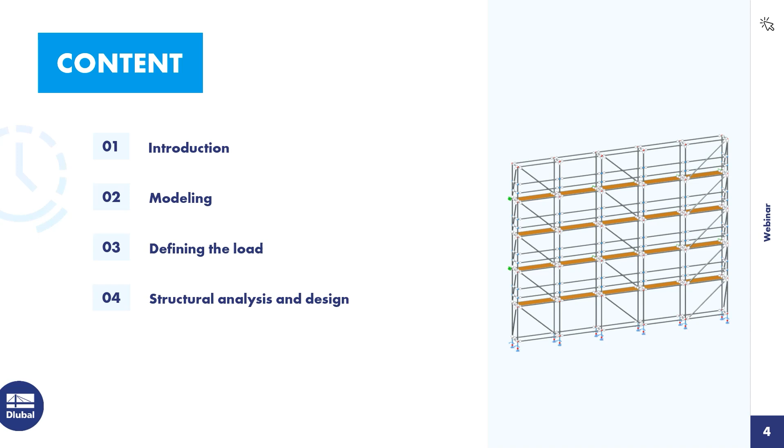To keep the number of combinations as low as possible, I will explain how to define dependencies between load cases so that certain load cases are not considered together. Finally, I will introduce the design using the aluminum design add-on and explain the most important steps in statics. Let's start with the first step, modeling the aluminum scaffolding.

RFEM offers various modeling aids, such as building grids and guidelines that facilitate input, for example, by snapping points at the intersection of these guide objects. Building grids and guidelines can be found in the navigator data under guide objects. Here, for example, you can easily create a new building grid by specifying the grid line coordinates here.

CAD files can also be imported, either for the direct creation of members or as a background layer to support modeling. Import from Excel is also possible. You can find the import functions on the File menu. Numerous import formats are available here.

Recurring components can be saved as blocks and reused as often as required. The geometry and loads of these blocks can be flexibly adjusted using parameters. The blocks are managed in the Block Manager. The Block Manager already contains a variety of blocks that you can use for modeling. Your custom blocks are also managed here.

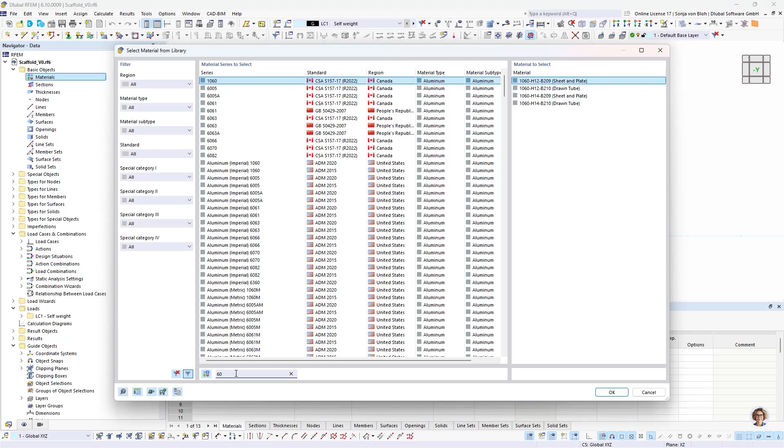Alternatively, it's possible to model the objects individually and combine them into the overall structure using functions such as copying or mirroring. Today, I'll show you the latter approach and start by defining the materials and cross-sections. For the scaffolding, I'm using an aluminum material. I import this material from the material library. Here I search for an EN AW 6082 material and I import this material in my list.

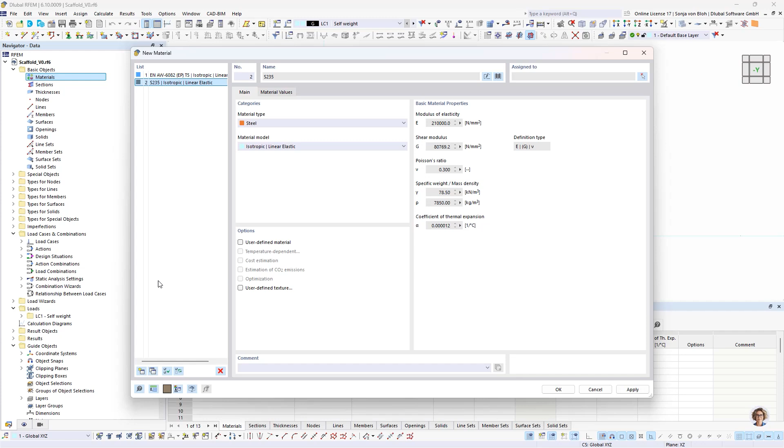The base jacks are made of steel. So for this, I create a new material and I import this also from the material library. It's an S235. Then I create another material for the platform units. These platform units are made of wood, and it's a C24.

Then I can define the cross sections. The standards, ledgers, and guardrails have a tubular cross section. So I create this first. The material aluminum is preset here in this case, so I go directly to the section library, and here I search for 48.3 for the tubular cross section.

The bracing in the vertical plane uses the same material, but with a slightly thinner cross section. So for this bracing, I create a new cross section, and I import this cross section also from the library, 48.3 and 3.2.

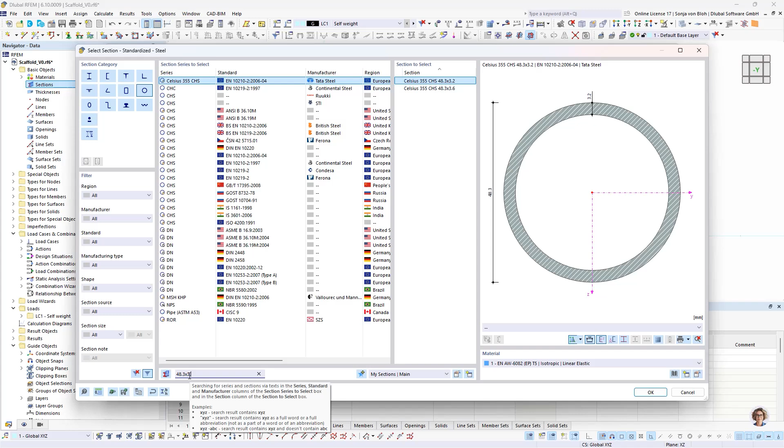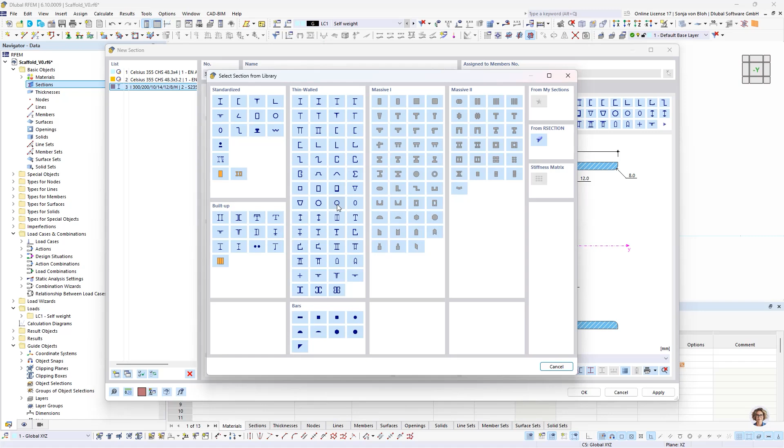The base jack is made of a tubular cross section and made of a steel material. For this, I create a new cross section. I choose here the material S235, and then I define the parameters of this hollow section by defining the geometry. It's a 38 millimeter diameter and a thickness of 4 millimeter, and it's a cold-formed cross section.

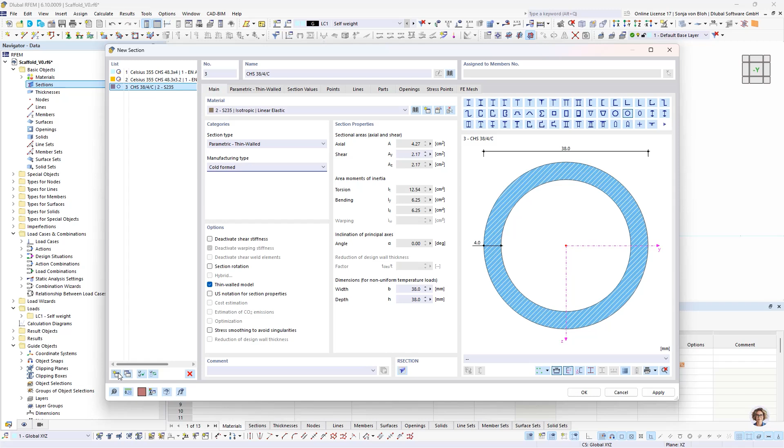The platform units have a rectangular cross section made of wood, so for this I also create a cross section. I choose here the C24, and then I define the parameters of this rectangle, and it's 320 millimeter and 40 millimeter height.

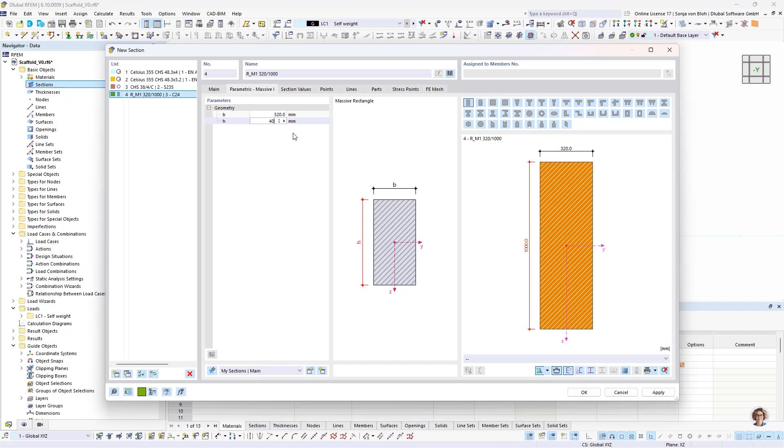Then I can define the structure. The base jack is modeled as a beam member. I will do this now. So I open here the member dialog. Then I assign the comment base jack so that I can make targeted object selections later. Then I go to the tab section and select here the steel section. And then I can model my member.

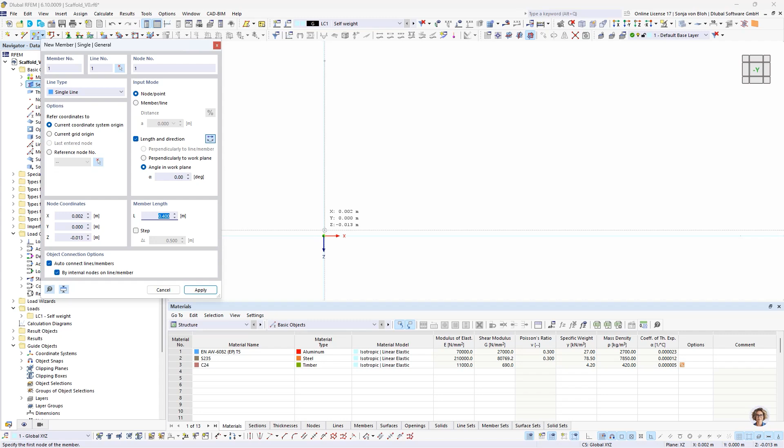I use here the input mode length and direction. The angle in the work plane is 0 degrees. The member length is 0.4 meters. I have to reverse the orientation, and then I position this member at the coordinate origin.

Then I define the supports here on this node. For this, I activate the support option. Then I can create my support. In the vertical direction, the standard can only take compression, but not tension. This is represented by the nonlinearity failure all if negative PZ.

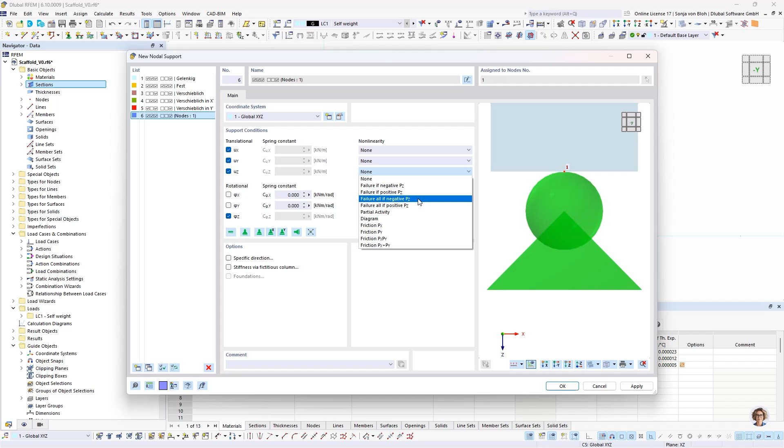The horizontal forces are transferred to the subsoil via friction. The friction depends on the support force in the vertical direction. For the UX and UY direction, I therefore assign the nonlinearity friction Pz.

Friction coefficients are listed in Annex B of EN 12812. The base plate rests on a wooden slab. The standard specifies friction coefficients between steel and wood of a minimum of 0.5 and a maximum of 1.2. For the calculation, I choose an average friction value of 0.85 for UX and UY.

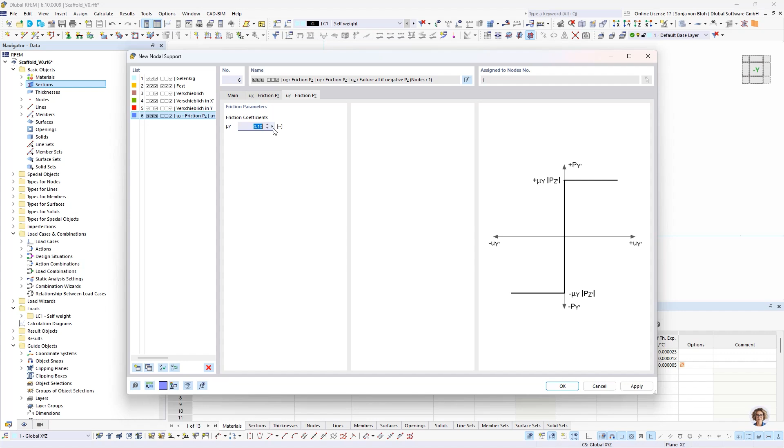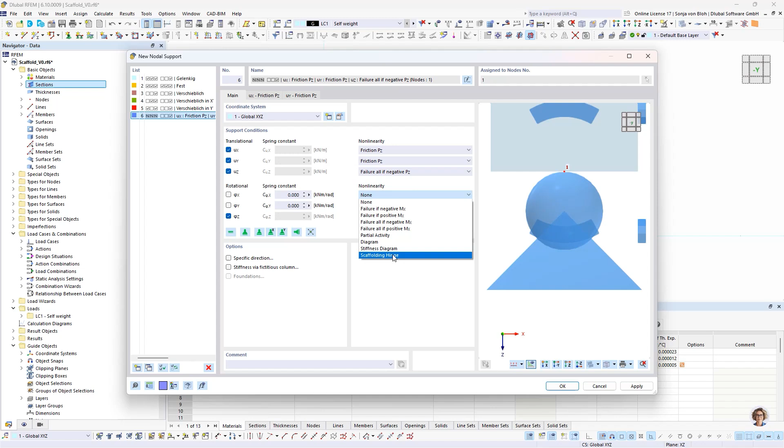According to EN 12811 Part 1 and EN 1065, a bilinear spring with a moment-rotation characteristic can be applied to the support of base jacks with rigidly connected end plates. RFEM provides the appropriate solution for this using the nonlinearity scaffolding hinge. The required torsional spring properties and the degrees of freedom φx and φy can be considered in accordance with the standards.

I only have to define the parameters of the scaffolding hinge. I define a rotation angle φ equal to 1 degree. Since the unit is in milliradians, you have the option to switch to a different unit or manually convert the angle. I perform the conversion. So here I calculate pi divided by 180 multiplied by 1000.

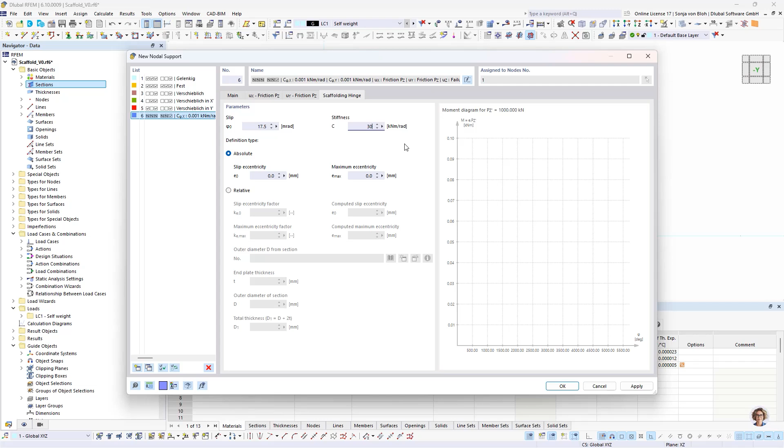Then I define the stiffness. This should be 30 kilonewton meters per rad. The definition type should be relative. Here I use the default settings for the eccentricity factors, and I import the outer diameter from my base jack. Then I define an end plate thickness of 10 millimeters.

Let's look at the diagram here. The support remains moment-free up to the defined rotation angle φ0. After that, the rotation no longer changes up to a moment of ME0, and this ME0 moment is calculated by the slip eccentricity factor multiplied by the total thickness multiplied by Pz.

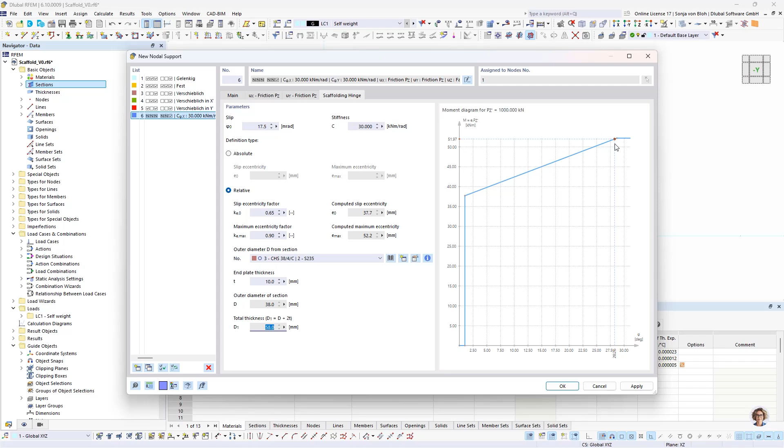Between this moment and the maximum moment, the support reacts with a torsional spring stiffness. The maximum moment is calculated by the maximum eccentricity factor multiplied by the total thickness multiplied by Pz. After reaching this maximum moment, a yield process is initiated.

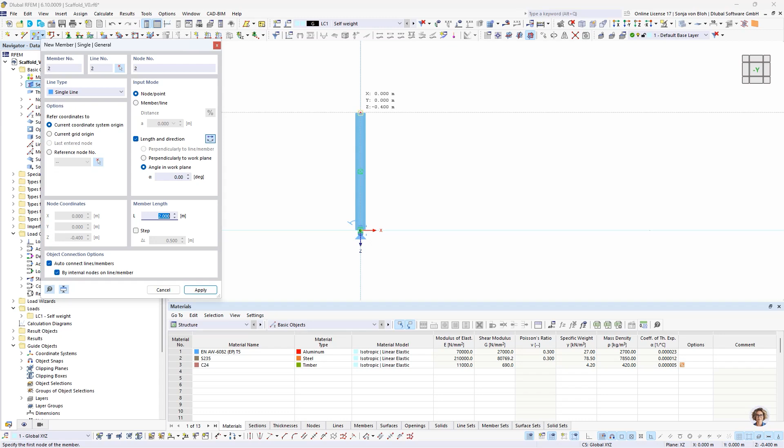Then I create the standard. The standard is modeled as a beam. Here I use the comment standard, and I use here this aluminum cross section. And then I can start to create this standard. For this I use the input mode length and direction. Angle in work plane is 0 degrees. Member length should be 2 meters. I reverse here also the orientation, and then I create this member.

EN 12811 Part 1 allows the joints between tubular members to be treated as rigid, provided certain design conditions are met. These include, for example, sufficient overlap length or that a certain limit for the play in the joint is not exceeded. Since these specifications are met by the scaffolding system used, I do not need to define any hinges for the connections. RFEM also offers special scaffold hinges that can be used to accurately simulate the mechanical effect of a plugged tubular joint with an inner tube stub between two members.

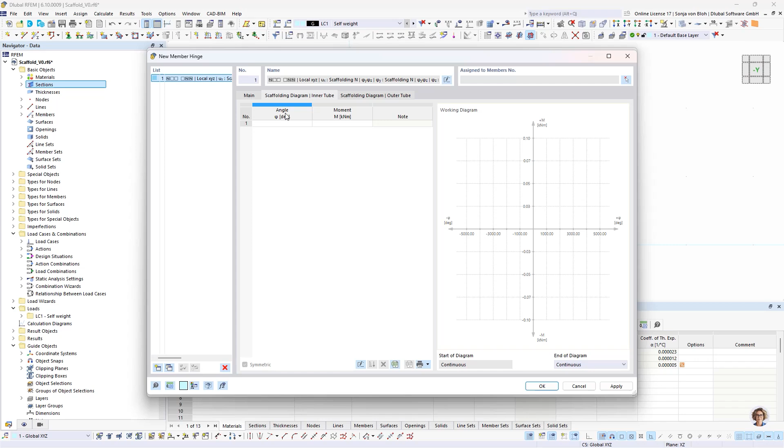I will show you this also. Here you have to activate the option hinges, and then you have to create a new hinge. And here you find the nonlinearity scaffolding, and then it's possible to define the scaffolding diagram for the inner tube and for the outer tube.

I then copy the base jack and the standard. For this purpose, I select them first, and then I open the Move/Copy dialog. I want to create a copy. The displacement vector is in X direction, 2.57.

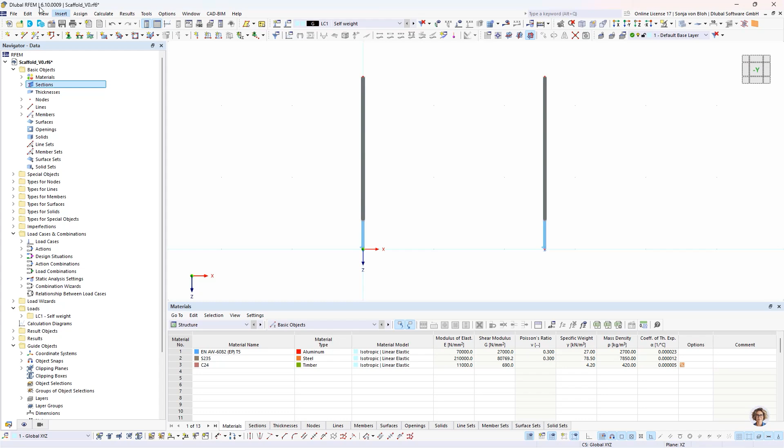I can now create the ledger between the two standards. Comment is ledger. Section is here this tubular aluminum cross section. The ledger is connected to the column via a coupler. Therefore, I activate this option hinges and create a new member hinge.

The joint stiffnesses specified in the approval are described there as a function. This function can be realistically represented in RFEM using the diagram nonlinearity. I import the diagram from a prepared Excel file.

The joint is only effective up to the maximum moment value, so I select yielding. The torsional spring stiffness Pz is 5.1 kN per rad.

I assign now this member hinge to the member start and member end.

The approval also defines connection eccentricities. I want to consider them too, so I activate this option and define a new member eccentricity. Eccentricity type is absolute, referred to the local coordinate system, 25 millimeters in X direction. I create also an eccentricity for the member end, absolute, in negative X direction.

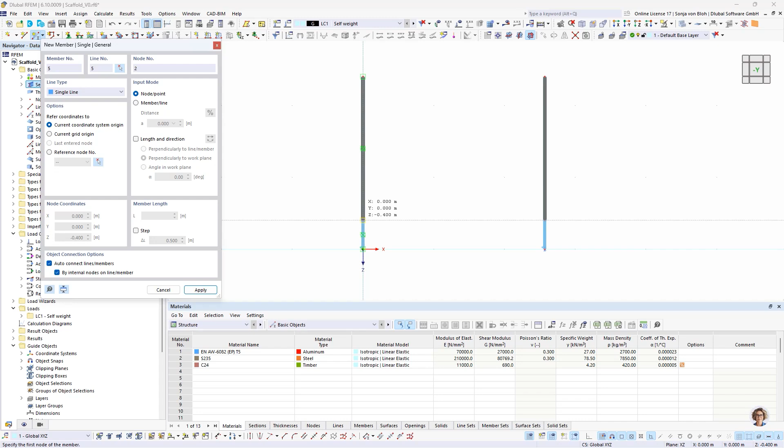I can now create this member. I then copy the entire structure. Displacement vector is here in Y direction, 0.73. And I can now create the transoms.

For this, I create a new member. Comment is transom. Section is here the same section as for the ledgers. The hinge conditions are also the same, and also the eccentricities.

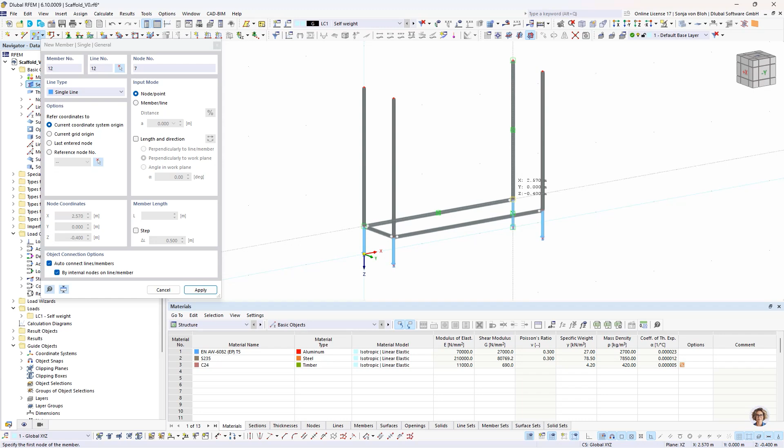I then create these transoms. I then create the longitudinal diagonals as a beam member, longitudinal diagonal. The longitudinal diagonals have a thinner cross-section, so therefore I choose here this cross-section number 2.

The approval specifies that the load displacement behavior of the vertical diagonal must be considered with a translational spring. This translational spring is different for tension and compression. Therefore, I create a new member hinge and use the nonlinearity diagram for this. To define different diagrams for compression and tension, I deactivate the symmetric checkbox.

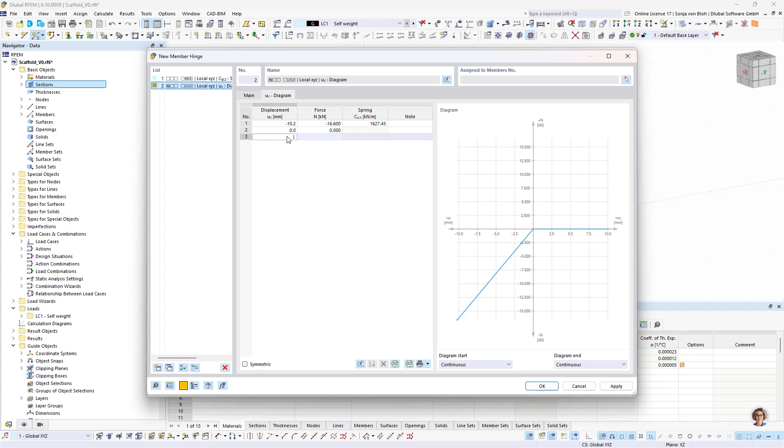I then define the parameters: minus 10.2, minus 16.6, 0, 0, 12.9, and 18.

I define the rotational spring stiffness about the y-axis as hinged. Here I deactivate this hinge and then I assign this hinge to the member start and member end.

The approval also defines eccentricities for the vertical diagonals. At the start of the member, I create a new member eccentricity. Eccentricity type is absolute, referred to the global axis system. Here it's minus 77 in X direction and 50 millimeters in Y direction. For the member end, I do the same: 77 and 50 millimeter. I can now create the longitudinal diagonal.

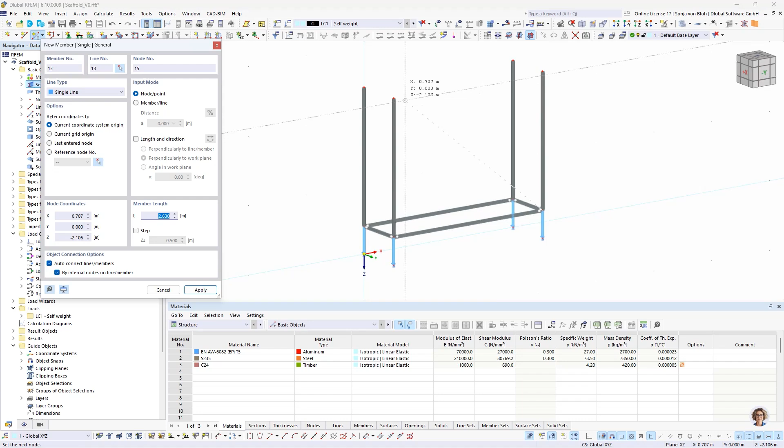I then create the transverse diagonal. For this, I create a new member. Section is here the same section as for the longitudinal diagonal. Also here the hinges are the same, but I have to define new eccentricities for this.

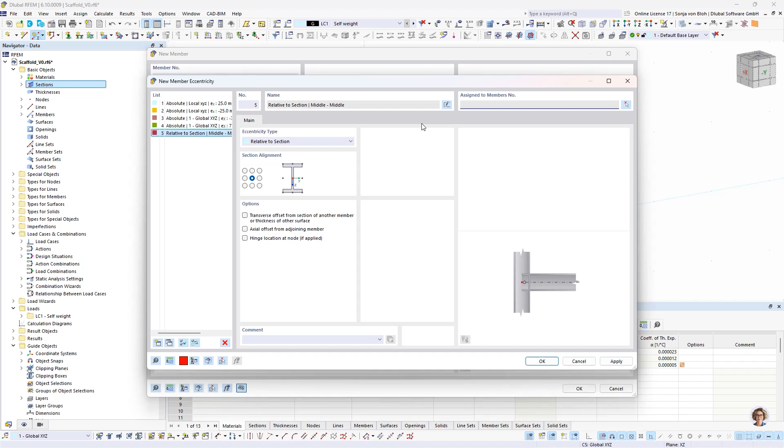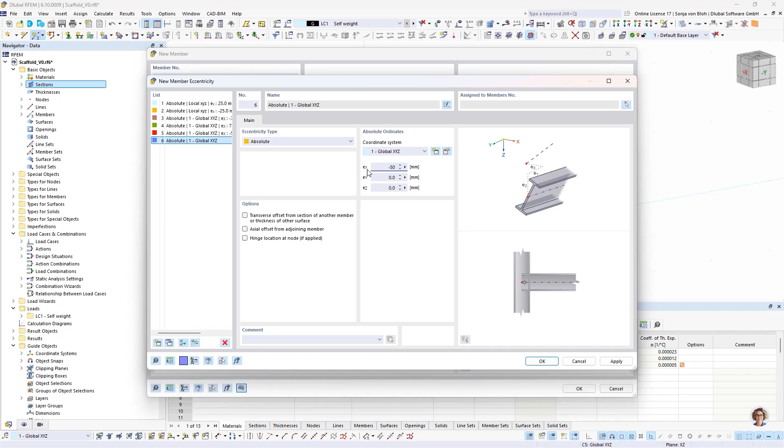So I create a new eccentricity: minus 50, 77 for the member start, and minus 50 and minus 77 for the member end. I can now create here my bracing.

For the static analysis, the axial stiffness of the vertical diagonals should be assumed to be nearly infinite. This is because the spring values defined in the approval replace both the stiffness of the diagonal members themselves and that of their connections. In RFEM, this can be implemented by structure modification, in which the axial stiffness is increased by a factor.

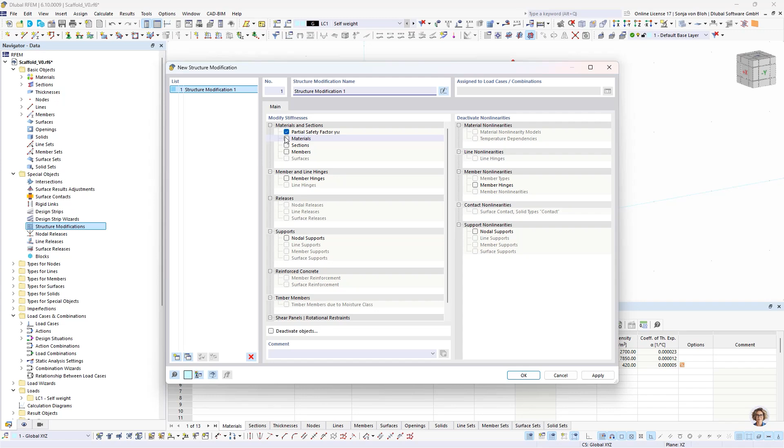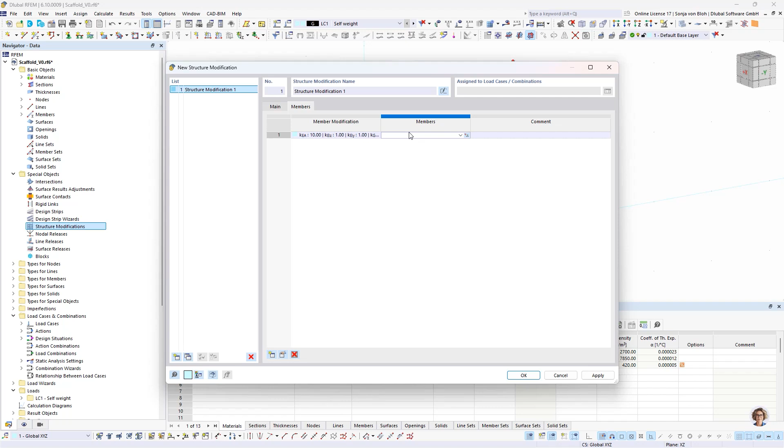You find the structure modifications in Navigator Data, structure modification. Here I create a new structure modification. I want to modify the stiffness of the members, so I create a new stiffness modification. Modification type is multiplier factors of partial stiffnesses, and here I increase the axial stiffness by a factor. Then I have to assign this structure modification to my bracings.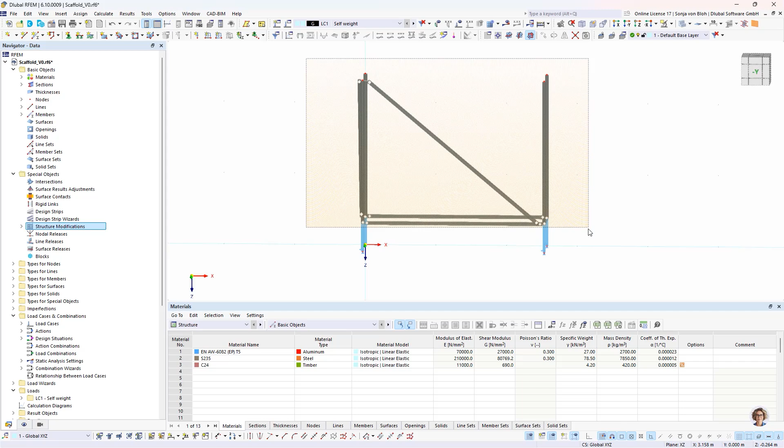I then copy the scaffolding 2 meters in negative Z direction. For this, I select here the objects, then I choose the move copy function, and here I change the displacement vector. And I copy then these members.

To model the guardrails, I define nodes on the standard using the nodes on member options. For this, I select the corresponding members and I edit them. Then I activate this option, nodes on members. I use here the definition type string, and I change to the absolute distances. Then I can create the node distances: it's 0.5 and 1.

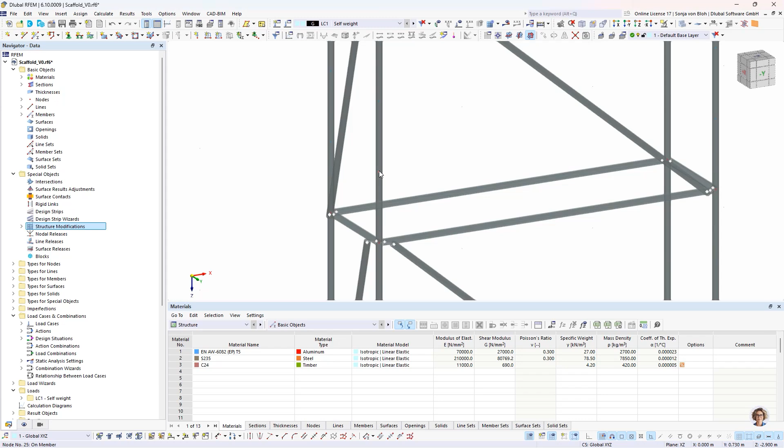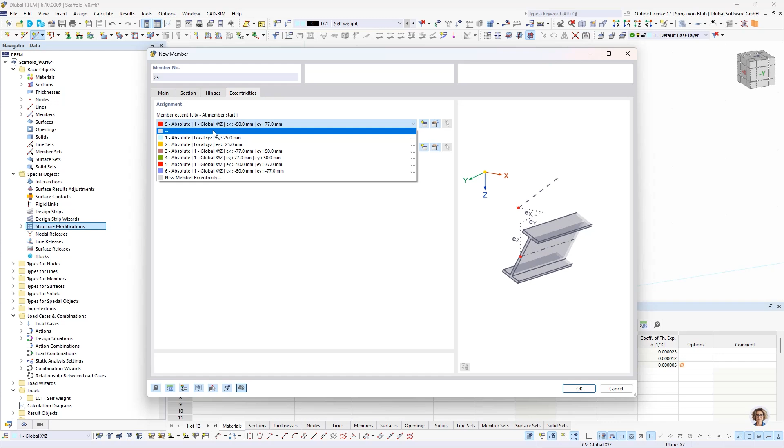The nodes were created here, as you can see. And then I can create the guardrails. For this, I create a new member. Comment is guardrail. Section is here section number 1. Hinges are the same as for the ledgers, and also the eccentricities are the same like for the ledgers. Then I can create my guardrails.

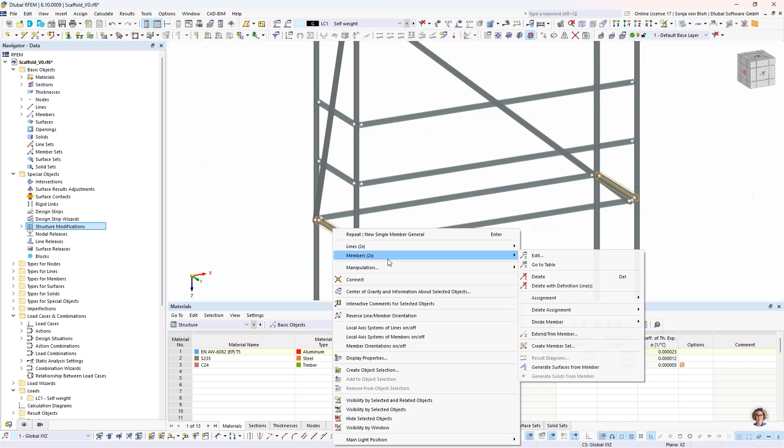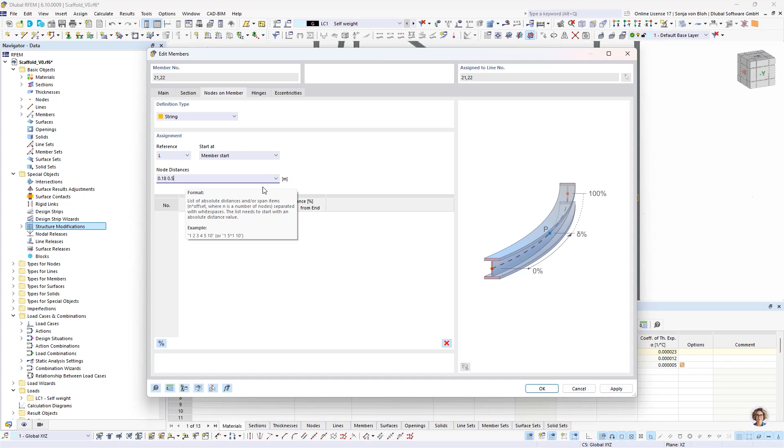To model the platform units, I define nodes on the transoms using the nodes on member option, like for the standards. For this, I select the members first, then activate the option nodes on member. I use the definition type string, absolute definition, and define a distance of 0.18 and 0.5 meter. Then I can create the platform units.

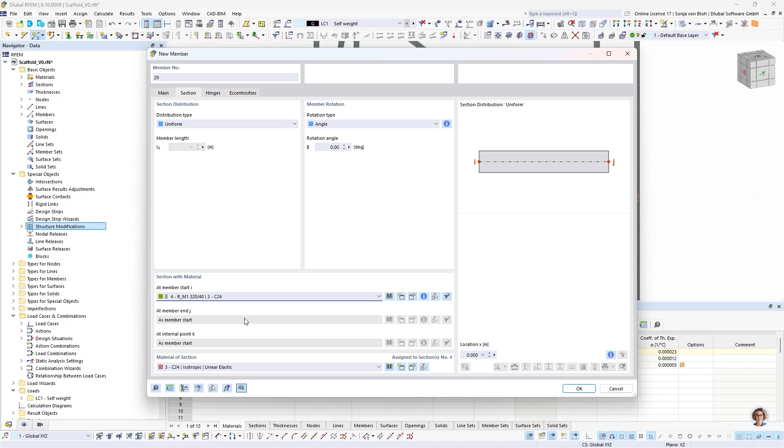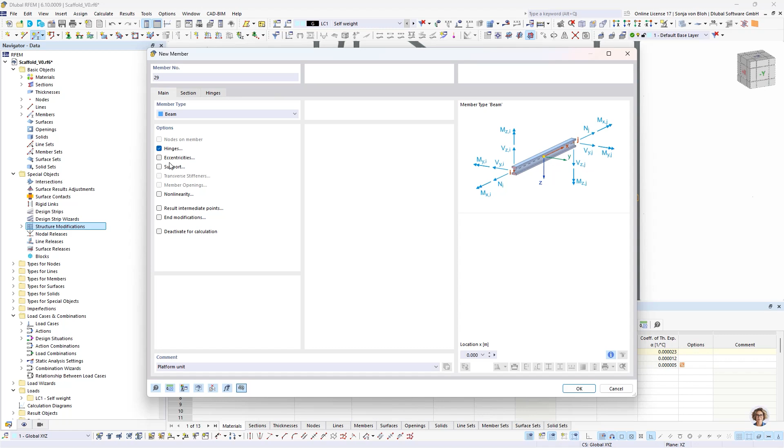Here I change the section to the rectangular cross section and define a new hinge type. It's hinged in φy for the member start and for the member end, and I don't need an eccentricity here. So I can now create the two platform units.

The scaffold is connected to the facade at 4 meter and 8 meter using anchors according to EN 12811 Part 1. The connection between the anchors and the facade must be modeled so that the anchors can rotate freely around all axes in the plane of the facade and no vertical forces are transmitted. For simplicity, the anchors are modeled directly on the scaffold using supports.

So I select here the nodes where I want to create my supports, and then I create a new support type, and I define here the corresponding parameters.

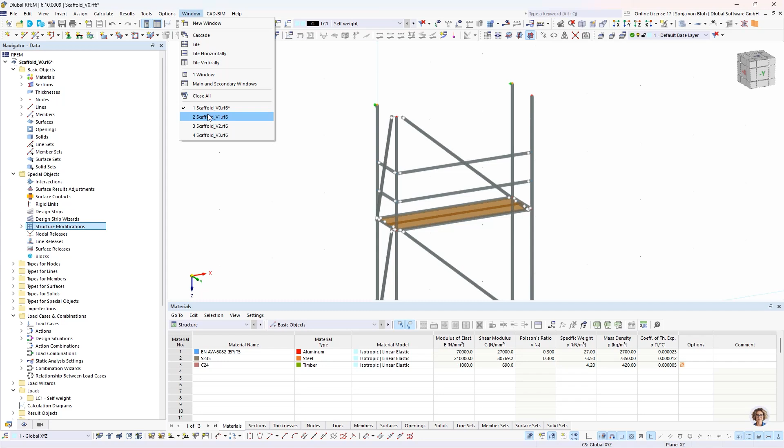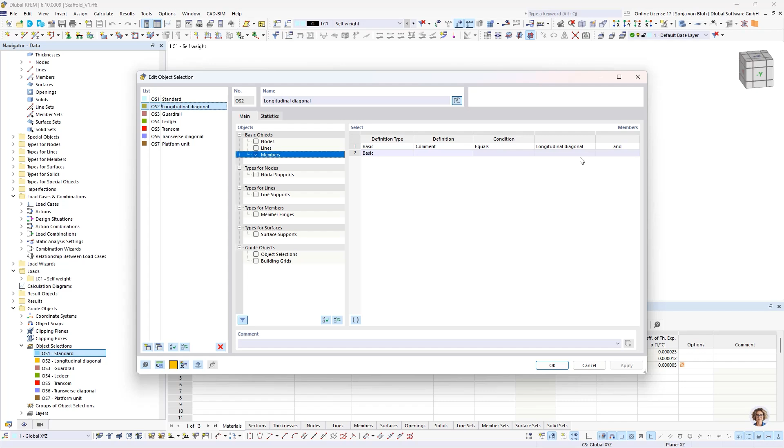The entire scaffold can now be created by copying and mirroring. I've already prepared this, so I open the prepared file. In the file, I've also already created object selections for the scaffolding components. You find the object selections in navigator data under guide objects, object selections, and these were generated using the comments stored in the member - for the standard, comment equals standard, for the longitudinal diagonal, comment equals longitudinal diagonal, and so on. The object selections are also available as visibilities in the navigator views.

So if you activate here the standards, you can see the standards, guardrails, and so on.

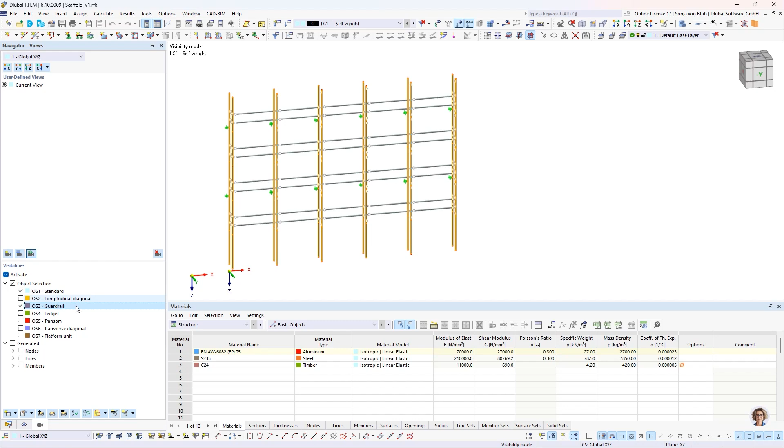In the next step, I define the actions. There are 3 types of loads that must be considered according to EN 12811 Part 1. These are permanent loads, such as the dead loads of the scaffold including all associated components such as protective roofs, variable loads such as live loads, wind loads, and possibly snow and ice loads, and accidental loads. The only accidental load specified in the standard is the downward load on the side protection.

EN 12811 Part 1 recommends considering wind loads parallel and perpendicular to the facade separately in the calculation. Furthermore, 2 combinations must be considered when designing a scaffold: the service condition and the out-of-service condition. The service condition corresponds with the self-weight of the scaffolding, a working load on the scaffolding, and a working wind load. The out-of-service condition corresponds with the self-weight, a percentage of the working load, and the maximum wind load.

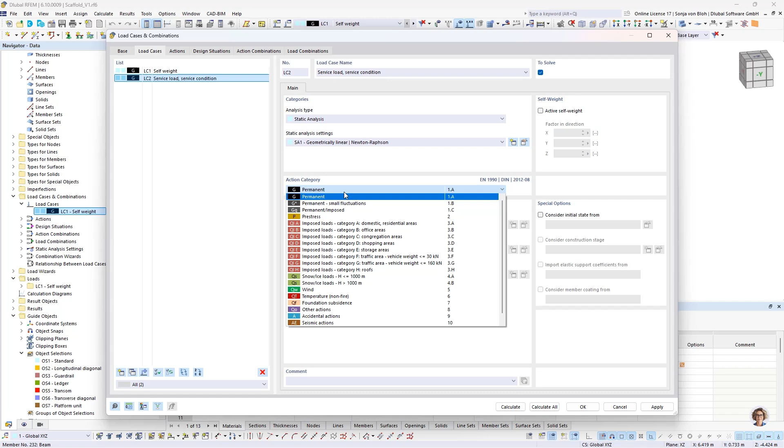I now define the load cases in which I can generate these actions. The load case self-weight is already created here, and the active self-weight checkbox is already activated so that self-weight will be automatically calculated. I define another load case for my service load and service condition. Action category is imposed loads.

I copy this load case for the out of service condition. Then I need to create the load cases for the working wind loads parallel and perpendicular to the facade. Action category is here wind. Working wind load X parallel to facade, working wind load Y perpendicular to facade.

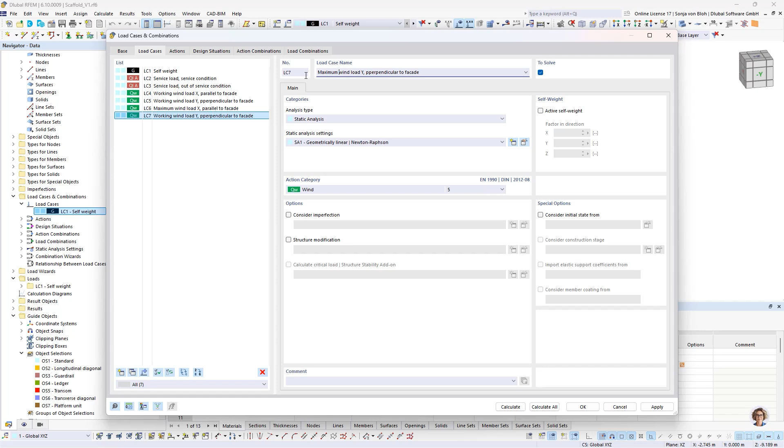And then the maximum wind load parallel and perpendicular to the facade. I don't consider the accidental load.

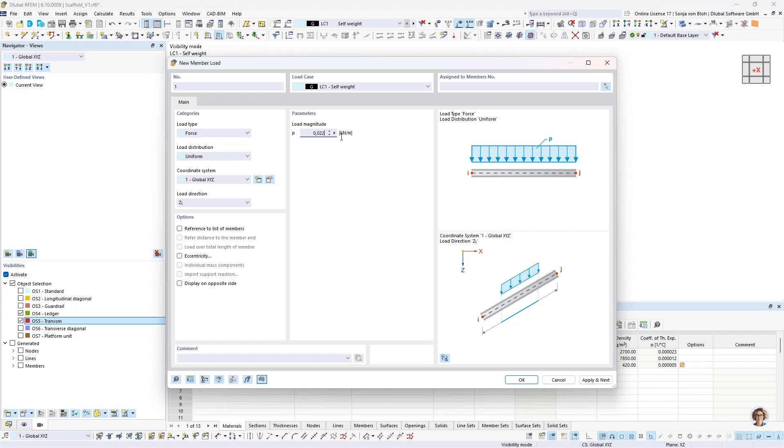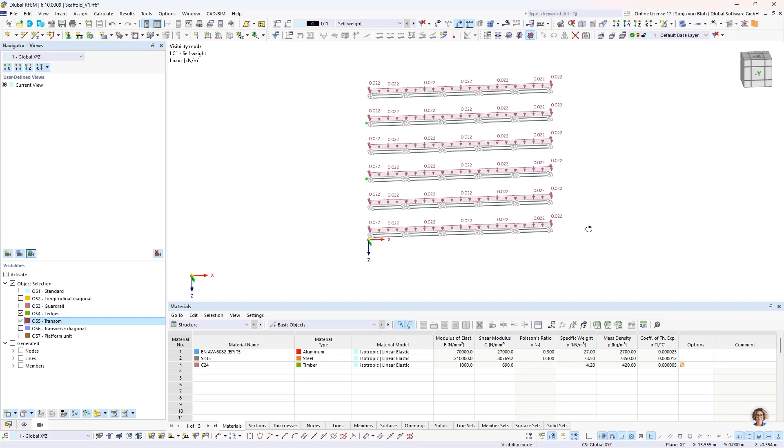Now I can define the loads. The dead weight is calculated automatically, as I said before. But since I've excluded the toe board from the model, I apply the dead weight of the toe board to the ledgers and the transoms. For this, I open the self-weight load case, and here I use my visibilities for the ledgers and the transoms. Then I create a new member load with a load magnitude of 0.023 kilonewton per meter in Z direction, and I apply this load to the front members and here also to the side members. This load case is now complete.

Then I can define my service loads. For this, I change to load case number 2. The service load to be applied during service conditions is determined by the load class. The scaffold must be designed for load class 3 according to table 3 of EN 12811 part 1. This corresponds to a uniformly distributed load of 2 kilonewton per square meter. The service load is applied to the scaffold level that leads to the most critical loading, typically the top level. According to the standard, 50% of the load must also be applied to the scaffold level immediately above or below the critical level, which corresponds to 1 kilonewton per square meter.

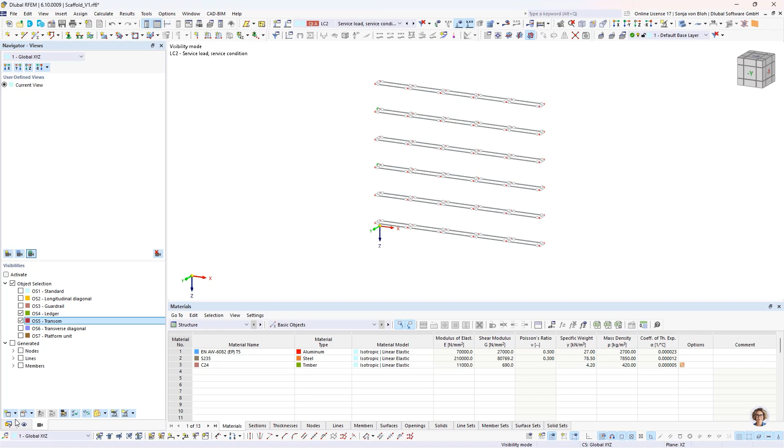For the service load, I use the load wizard, member loads from area load. For this, I go to navigator data, and here you find the load wizard member loads from area load. This tool allows surface loads to be easily distributed onto the relevant members in the model. The wizard calculates the load shares automatically, so I don't need to do it manually. The load magnitude is 2 kilonewton per square meter acting in global Z direction. I define the surface load plane by selecting the corner nodes.

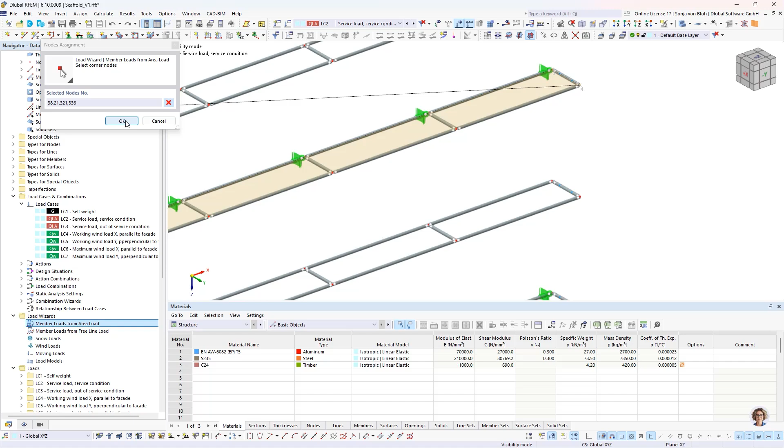Since the load should only act on the platform units, I remove all other members from the load application. To do this, I pick these members in the graphic.

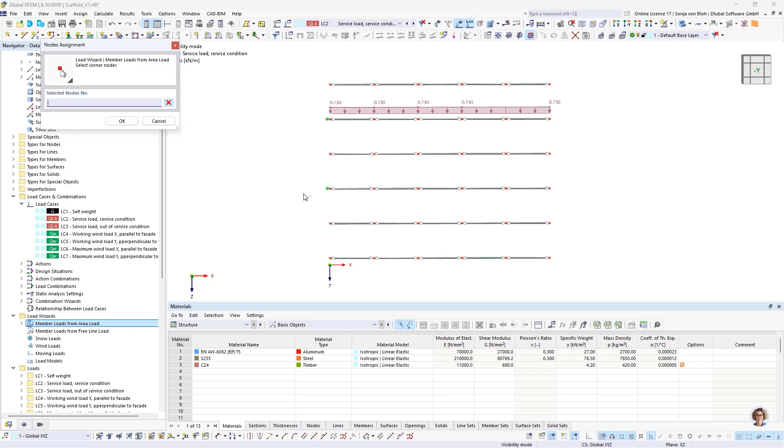A surface load of 1 kN per square meter is applied to the scaffold level below. For this, I create a new load wizard. I define here a load magnitude of 1 kN per square meter. Then I pick here the corresponding nodes.

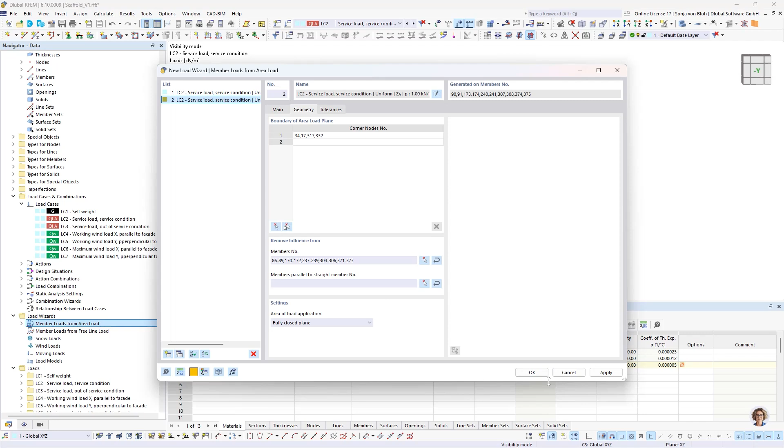And I also remove the influence on the ledgers and the transoms. Then I apply this load. This load can be shown also as service load.

For this, I deactivate here the option display separately.

For the out-of-service condition, a percentage of the uniformly distributed service load must be applied to the relevant scaffold level. The percentage depends on the load class and amounts to 25% for load class 3. This corresponds to 0.5 kN per square meter on the top scaffold level.

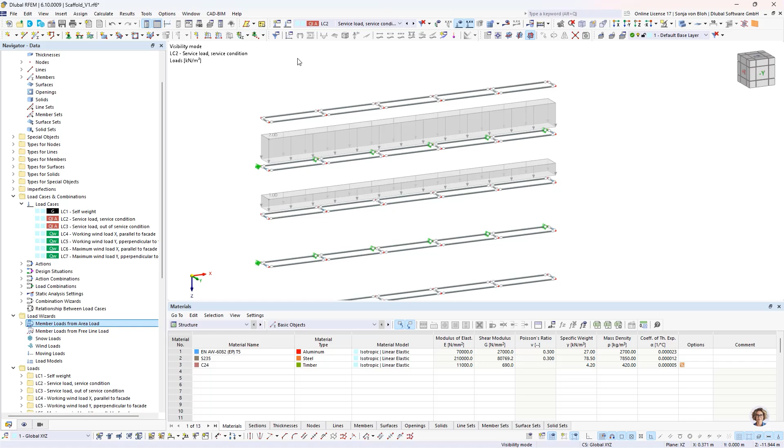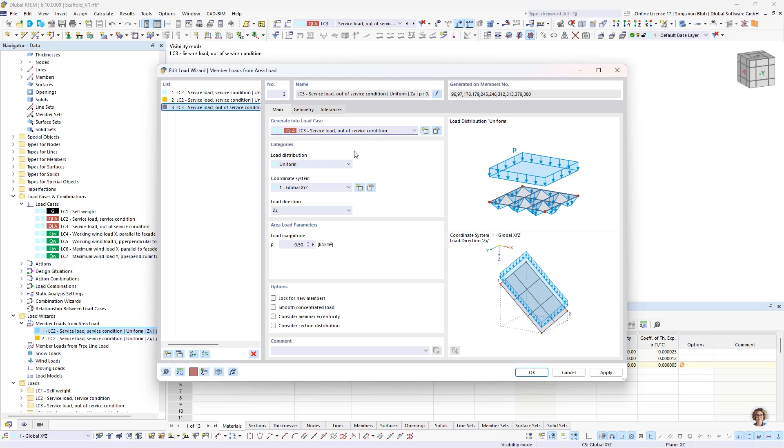To do this, I copy the surface load from the service condition on the top level and change the load magnitude. I switch here to load case number 3, then open here the load wizard. I copy the load, change here the load magnitude to 0.5, and then change here also the load case where this load should be generated, and click then on OK.

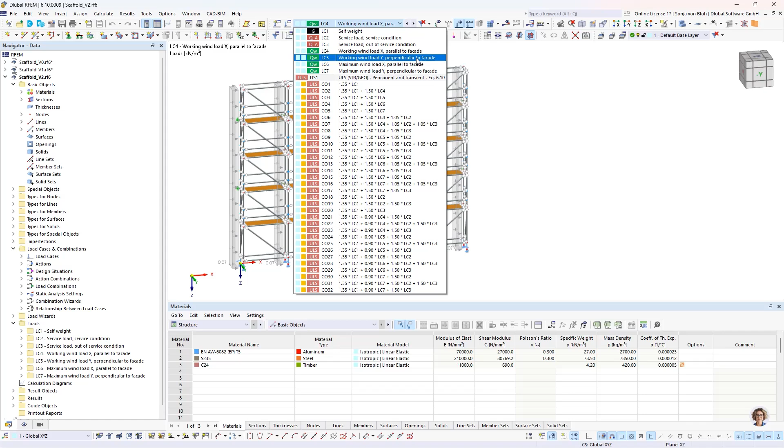You can also use the load wizard to generate wind loads, because the input is very similar to that for the service load. I've gone ahead and prepared it already. So I open the prepared file. You can see here the working wind loads parallel to the facade, perpendicular to the facade, and the maximum wind loads parallel and perpendicular to the facade are already defined.

So in the next step, we can focus on the design. In this webinar, I will concentrate on the ultimate limit state design of the standard. According to Eurocode 9, a second-order analysis considering the relevant imperfection is permitted. In this case, only cross-section checks are required, since stability effects are already captured by the analysis.

The connections between the standards have been modeled as rigid joints. However, to account for the rotational play resulting from the slip in the plug connection, EN 12811 Part 1 requires the consideration of frame imperfections by angular deviations at the joints between vertical components. In addition, the maximum permissible vertical deviation of the base jack must be taken into account in the calculation.

First, I create imperfection cases in X and Y directions in which the relevant imperfections are defined. To do this, I go to the Navigator Data and create here a new imperfection case. This is the imperfection case for the imperfection in X, and another one for the imperfection in Y.

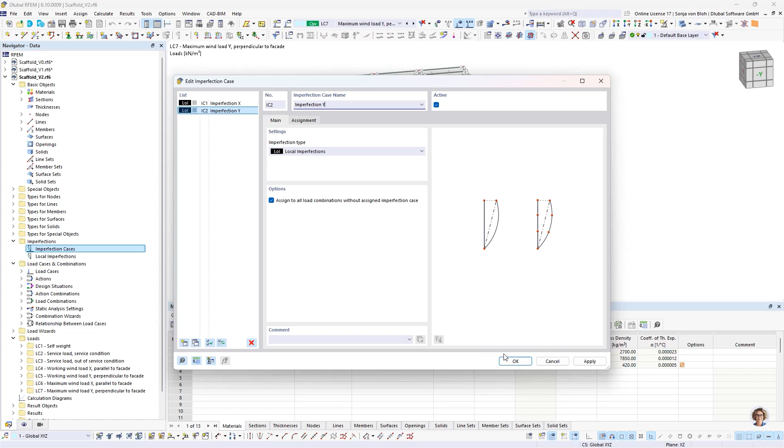Since I only want to perform the design checks for the standards within the scope of this webinar, I define the imperfections only for the standards. In the imperfection load case X, I define the initial sway with a ratio of 1 divided by 300 for the base check, and then 1 divided by 100, alternately in positive Z and negative Z direction for the standards.

For this, I define a new member imperfection. Here I choose the imperfection type initial sway, the definition type relative. Initial sway should be 1 divided by 300. Imperfection direction is Z. And then I choose here the base check, and then I click here on apply next.

Then I define an initial sway for the standard. And I choose here these members, click on apply and next.

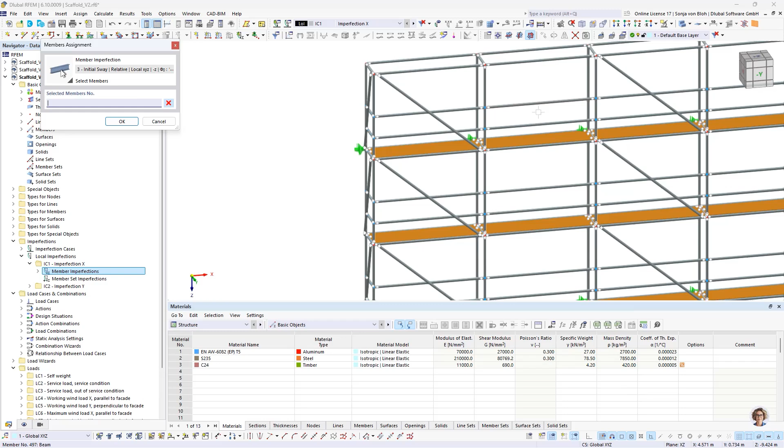Then I change the imperfection direction and choose then the other standards. Apply and next.

Next, I define the initial bow with e0 divided by L equal to 1 divided by 150, alternately for the standards. So I choose here initial bow, 150. Then I choose the corresponding members. These are these members. Click on apply and next.

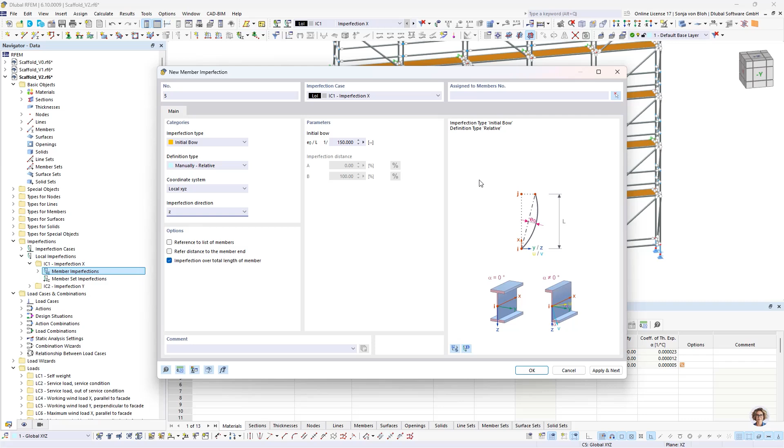Then I change the imperfection direction and choose here the other standards.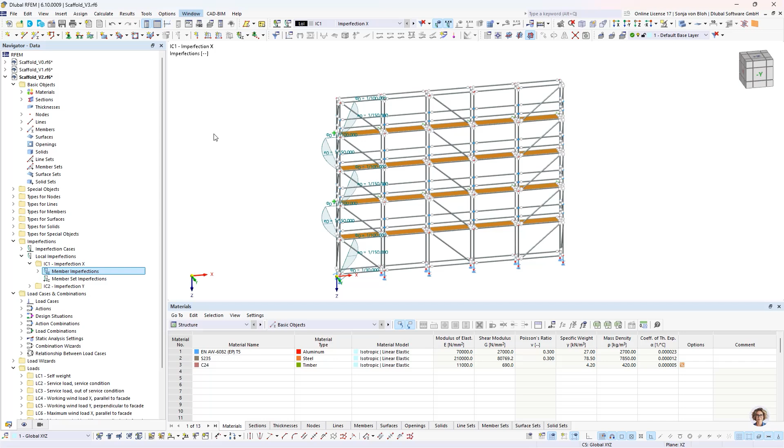It's now possible to copy imperfection to other standards. Let me open my file where this process has already been completed. So I open here this file where I've already defined the imperfection in X and in Y direction.

I can now proceed to set up the necessary parameters for load combinations for the ultimate limit state according to EN 12811 Part 1. Partial safety factors of 1.5 must be applied to all permanent and variable actions.

The load combination can be represented in Rfem using a user-defined load combination. For this purpose, I open the load cases and combinations, then go to the design situations and open the combination wizard. I activate the option user-defined action combinations, which allows me to define the action combinations user-defined.

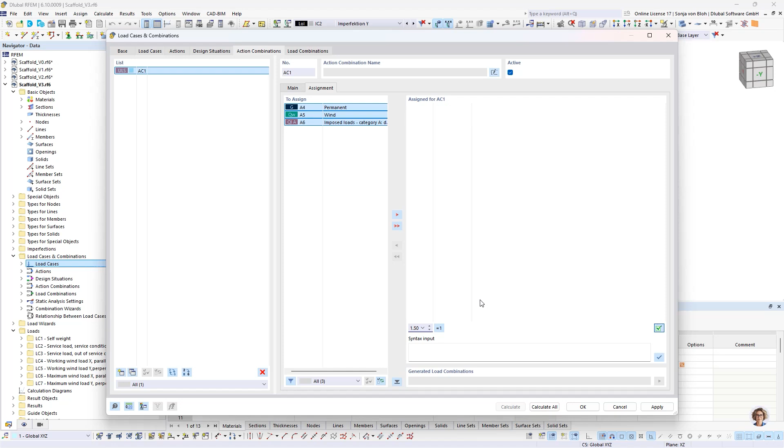In the next step, I create a new user-defined action combination, and there I assign all these actions, but here with a partial safety factor of 1.5.

Then I go to the actions to ensure that the service loads are not combined with each other. I set the action type to alternatively for this action category. For the wind load, this setting is already applied by default.

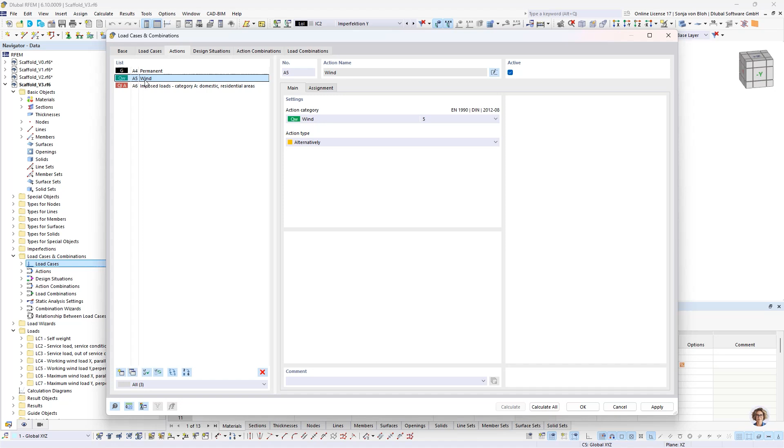The service loads for the service condition should not be combined with the maximum wind loads. Furthermore, the service loads for the out of service condition should not be combined with the service wind loads. This can be accounted for in Rfem by using exclusive load cases.

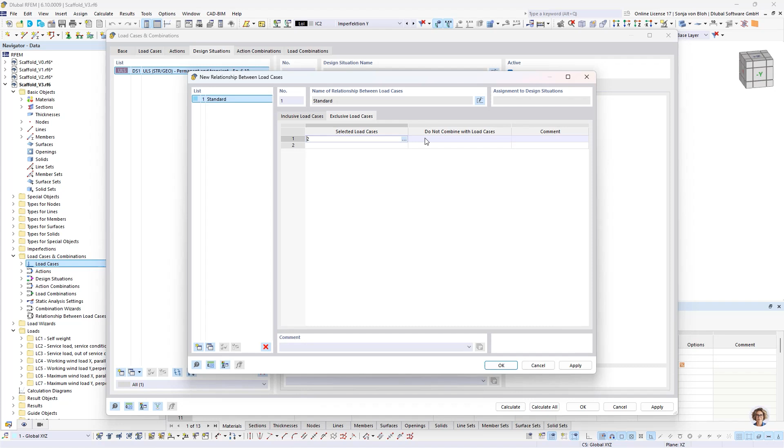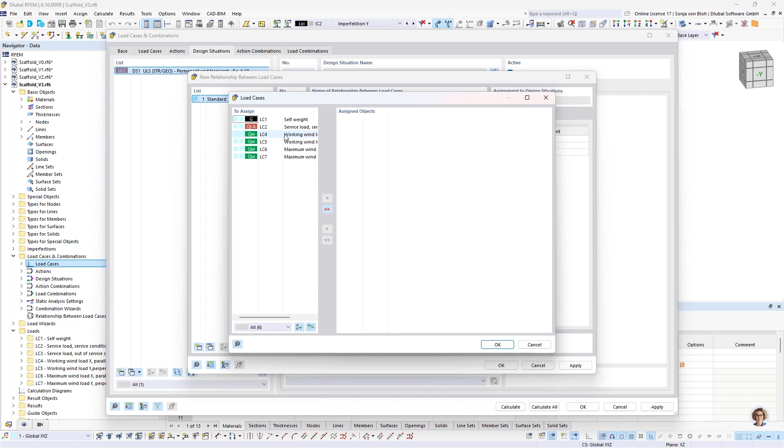I activate the checkbox Consider exclusive load cases, and then I create a new relationship between load cases. In the exclusive load case tab, I specify that load case 2, the service load in service condition, should not combine with load cases 6 and 7, the maximum wind loads. And load case 3, the service load out for the out of service condition, should never combine with load cases 4 and 5, the working wind load cases.

In the combination wizard, I also activate the structure modifications so that they are considered in the calculation. Furthermore, the imperfection cases are to be included in the load combinations. Here, the corresponding checkbox is already activated.

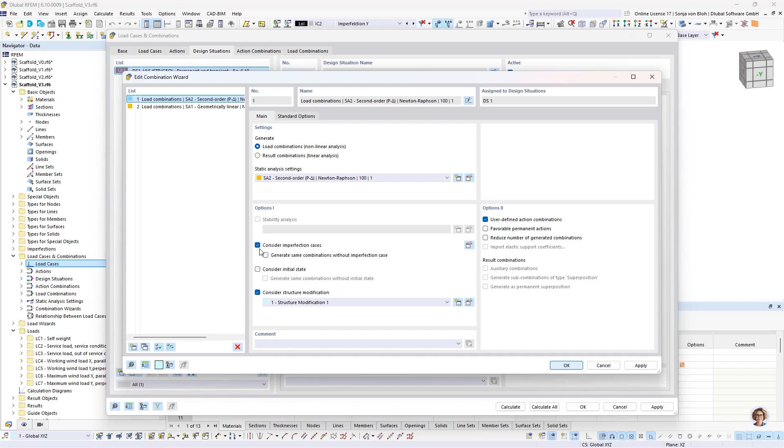However, the imperfections in X should only be combined with the wind loads in X direction, and the imperfections in Y only with the wind loads in the Y direction. For this purpose, I open the Edit Imperfection Case dialog.

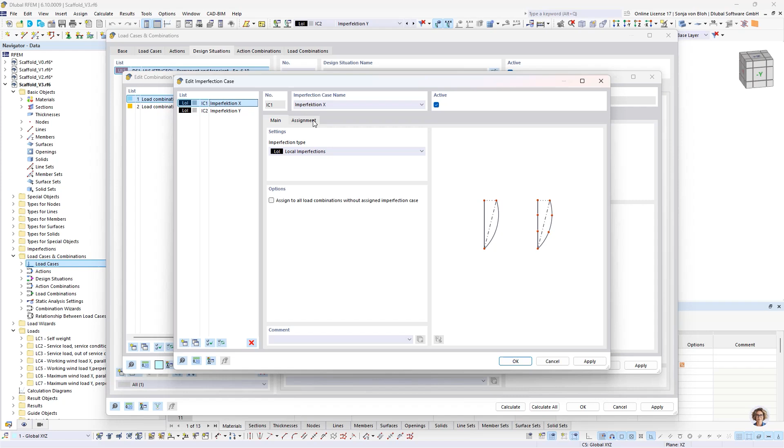I select all my imperfection cases and deactivate the checkbox Assign to all load combinations without assigned imperfection cases. Then for the imperfection case X, I assign the wind loads in X direction, and for the imperfection in Y, I assign the wind loads in Y direction.

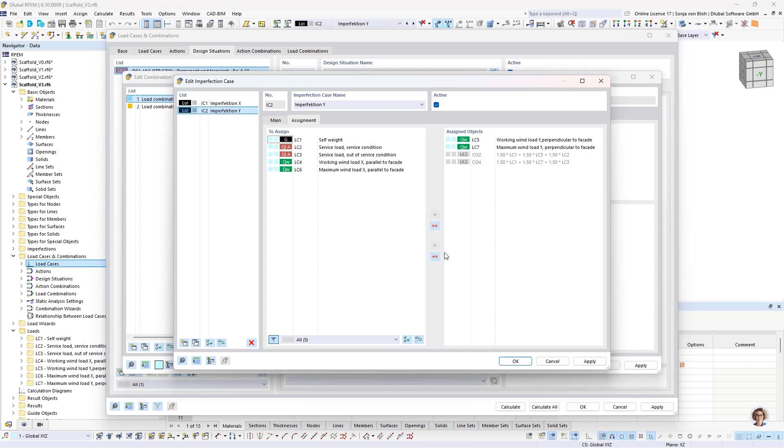Now the load combinations can be generated. The scaffold as well as the loads are now fully defined.

So in the next step, I can proceed with the settings for the aluminum design. To do this, I first activate the corresponding add-on, here in the base data.

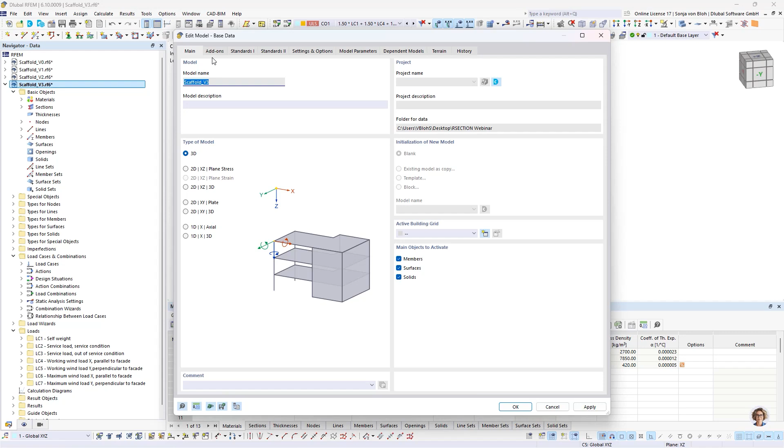And here I activate this add-on, aluminum design. Then I choose the corresponding standard and national annex.

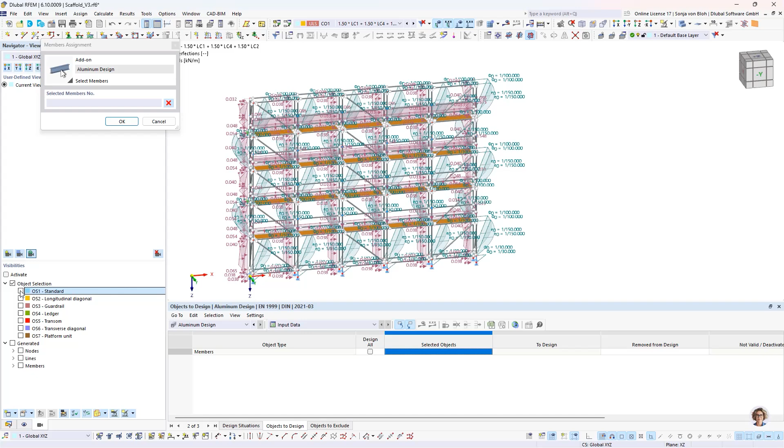Then I switch to the table of the aluminum designs. Here in the objects to design, I select all the standards. To do this, I deactivate this checkbox, and then select the standards with the help of the visibility of the standards.

Additionally, I deactivate the stability design in the ultimate limit state configuration. For this, I open the ultimate limit state configuration.

This is because the calculation is performed according to the second order theory and imperfections have already been considered. Therefore, only the cross-section checks are required, as stability effects are already captured by the calculation itself.

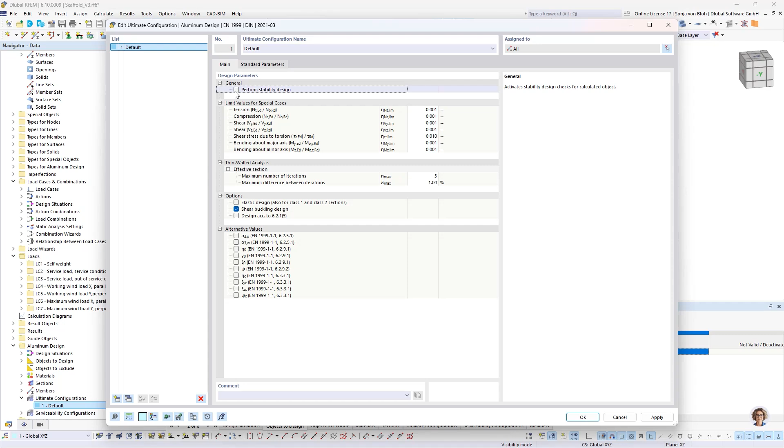I can now run the calculation.

The utilization ratio for all standards is below 1, which means that the cross-sectional checks for the standards are fulfilled. That brings me to the end of the webinar. I now hand the floor back to Andreas.